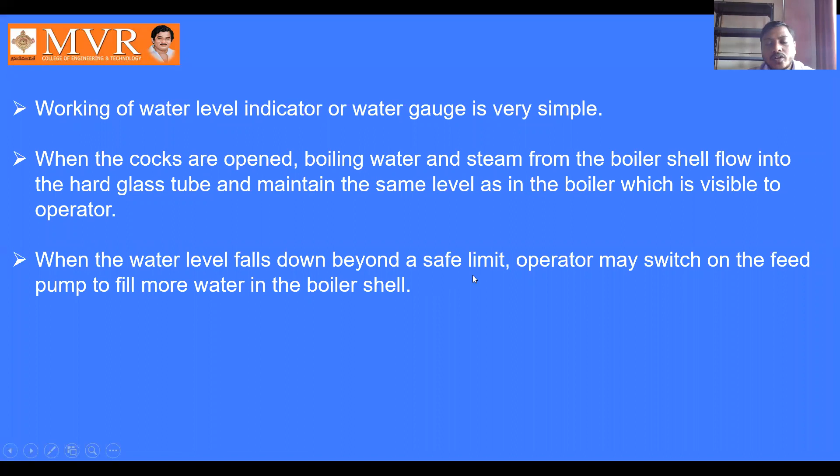When the water level falls beyond a safe limit, the operator may switch on the feed pump. In case of breakage of the glass tube by accident, water and steam contained at high pressure in the boiler rush at high speed towards the broken glass due to the large pressure difference between inside and outside of the boiler. If this breakage of glass takes place, we can control it using the steel balls.

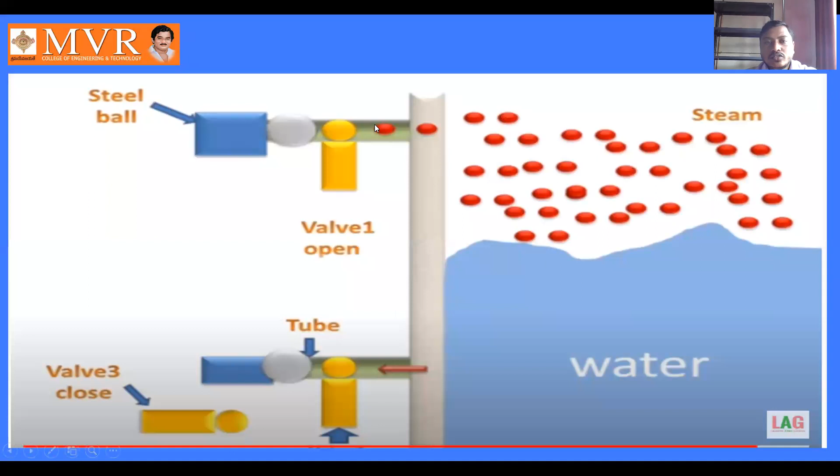Due to this, the ball resting in the cavity made in the passage lifts and rushes towards the end of the gunmetal tube and blocks the passage of steam or water. Then immediately the cocks can be closed and the glass tube can be replaced safely. These two cocks are closed and we can replace the glass tube here.

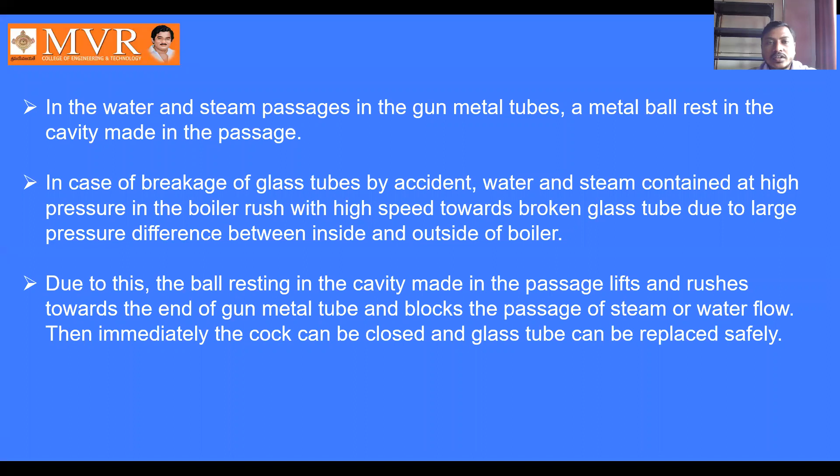This is what the feed water level indicator is about and how it works in the boiler.

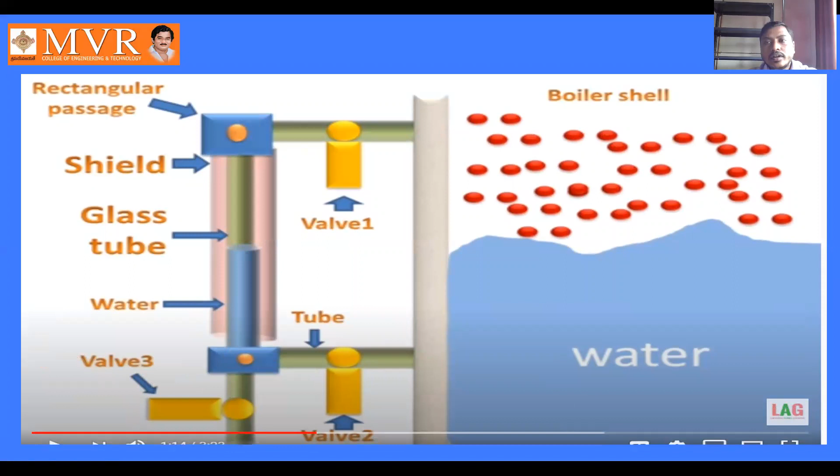As shown in the figure, it consists of two openings or valve seats which are closed by two valves attached to a single lever. By using a single lever, we have two valve seats.

The lever is pivoted at one end and attached to a spring at the middle. It is attached at one end and at the middle part is attached to the spring. The spring is fixed at the bottom end with the overall body of the valve.

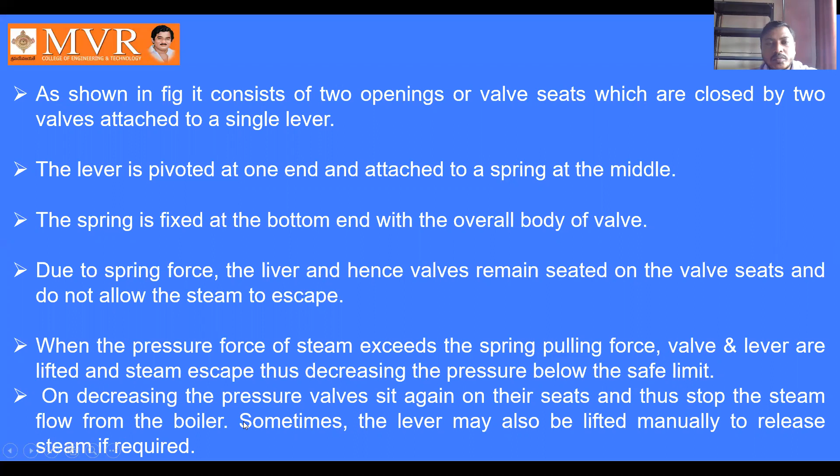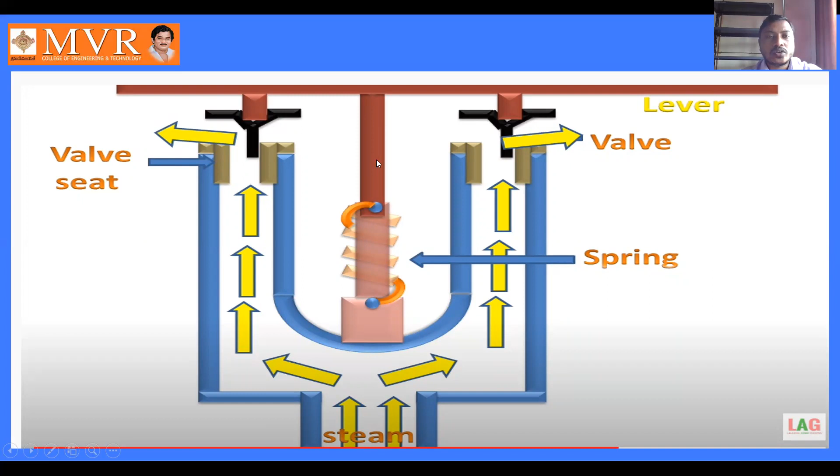The steam escapes outside, decreasing the pressure below the safe limit. On decreasing the pressure, the valve sits again on its seat and stops the steam flow from the boiler, coming back into its original position, where valve and lever sit in the same positions. This is what about the safety valve.

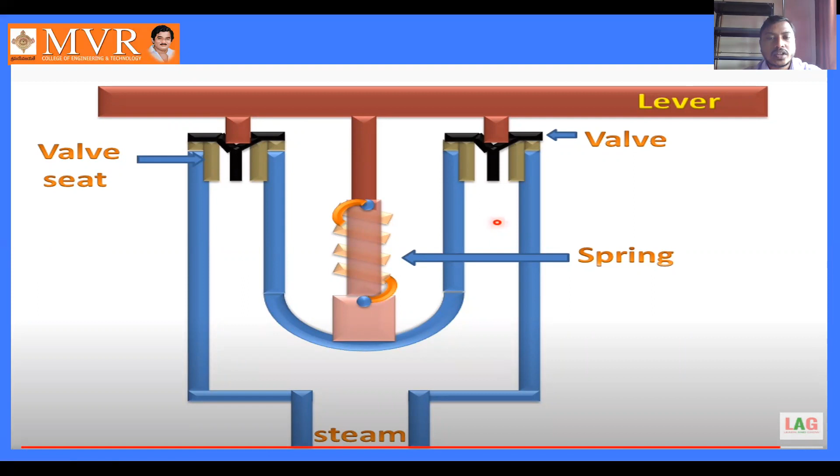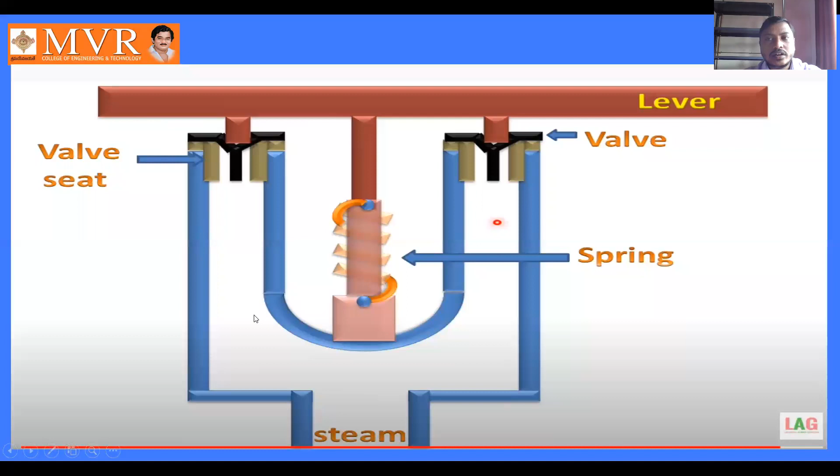Safety valve means nothing but a device used to control the steam escaping to the atmosphere. Due to high pressure developed, more than the spring load, the steam escapes into the atmosphere. When the pressure load is increased, the lever and valve move upward and the steam is allowed to exit outside. This is what about the safety valve.

Overheating can be caused by a low water level in the boiler. If we maintain a low water level in the boiler shell, overheating occurs and the boiler gets damaged. To control this damage, we use the fusible plug.

It is fitted in the crown of the furnace or firebox at the appropriate place. This is the construction: this is the hollow gunmetal body here, and this is the hollow gunmetal body too. These are the crown plates, and this black color shown here is the fusible metal, and inside this fusible metal in a conical shape is the hollow metal body. The construction of the fusible plug consists of two hollow metal bodies and one conical plug.

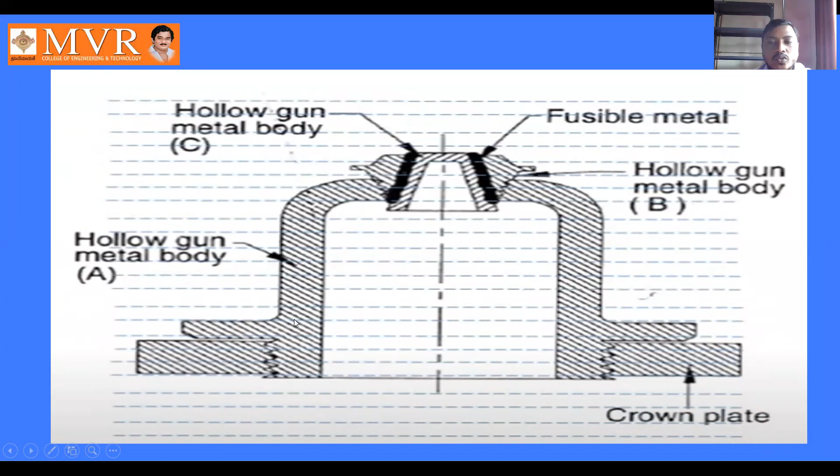The fusible plug is fully immersed in the water. The dotted lines shown here represent the water, and the fusible plug is fully immersed inside it. Here we see the hollow gun metal body, the conical shaped plug, the two hollow gun metal bodies, the fusible metal, and the crown plate. The full body is fully immersed in the water.

Now let's observe the working principle. Under normal boiler conditions, the fusible plug is fully submerged underwater, as we can see here. When the water level falls below the fusible plug, the water level decreases here, below the plug.

The plug gets uncovered from the water, meaning it is no longer covered by water, which tells us the water level has decreased. The upper portion of the plug gets exposed to the steam space. Above the water in the boiler, we have steam, and this upper portion of the plug is now exposed to that steam.

The steam cannot keep the plug cool, since the plug is no longer immersed in the water shell. Being exposed to the steam space, it gets heated. The plug gets uncovered from water, the upper portion is exposed to the steam space, and since it is exposed to steam, the plug cannot stay cool. This will overheat the fusible metal.

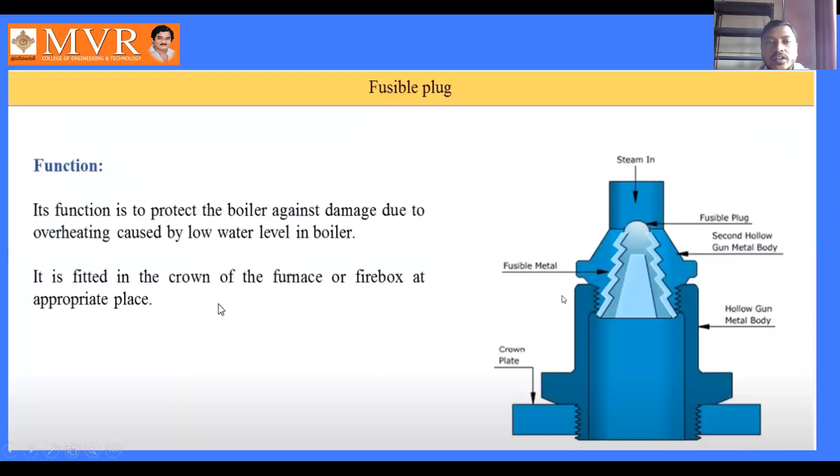The fusible plug remains submerged in water and its temperature does not exceed the limit. As this fusible plug is fully immersed in water, it does not exceed the melting temperature because its heat is transferred to the water.

If, under some unwanted condition, the water level comes down to an unsafe limit, decreasing the water level in the boiler shell, the boiler is going to be damaged.

The fusible plug is exposed to steam in place of water, and on the other side it is exposed to fire. So its temperature exceeds its melting point due to very low heat transfer to steam, and it melts down.

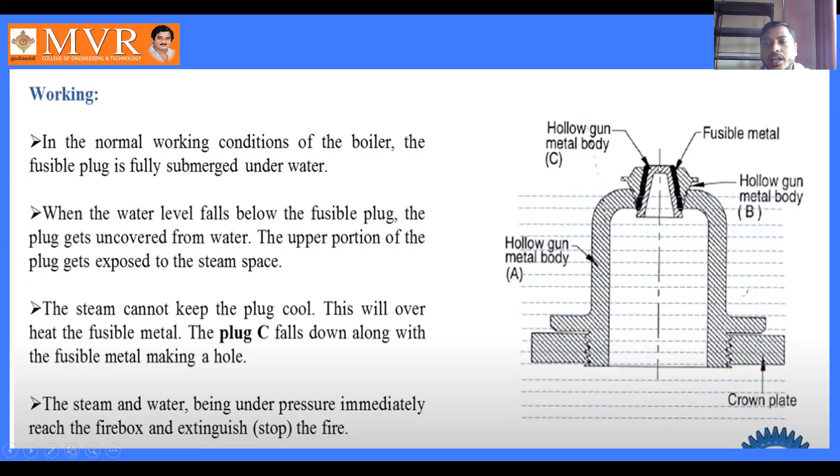If the water level goes down, the fusible plug we are having is exposed to the steam and its temperature increases. As the temperature increases, it makes a hole, and the fusible metal as well as the fusible plug drop downward.

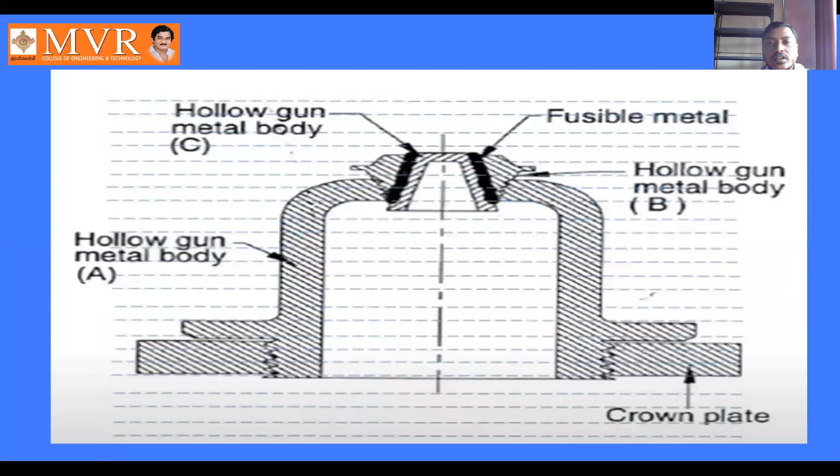Immediately, steam and water under high pressure rush to the firebox and extinguish the fire. This is how we use the fusible plug in the boiler to control damage to the boiler due to high temperatures.

Coming to the bourdon pressure gauge: we already know the pressure gauge from studying different types of boilers, and we observed how it works. The pressure gauge is used to show how much pressure is maintained in the steam. This is the bourdon tube type pressure gauge, which we can observe here.

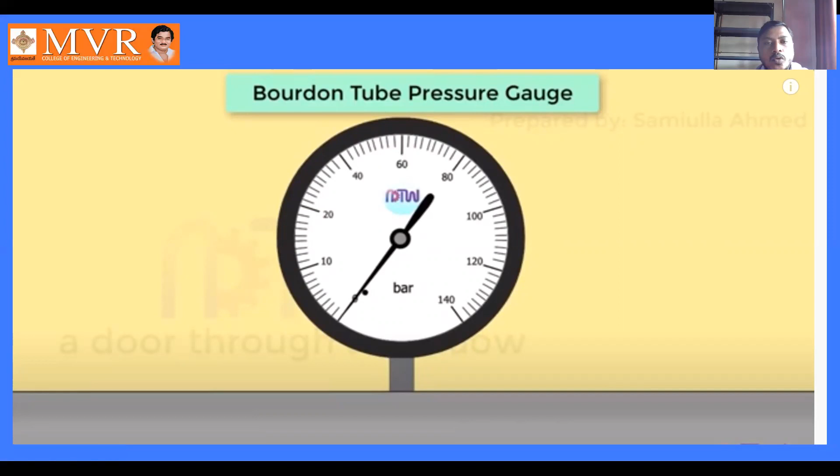In the bourdon type pressure gauge, we are going to know the working principle, construction, working, advantages and disadvantages. Let's look at the working principle here.

The working principle is that inside the dial gauge we are having a U-tube shaped bourdon tube, a C-type bourdon tube. The shape of the bourdon tube is somewhat downward.

After the working has taken place, it extends or moves somewhat upward. In the construction, when steam enters into the pipe, this is the pointer, this is the C-type bourdon tube, and this is the sealed end. One end of the bourdon tube is connected to this pointer.

We can observe the adjustable link here. One end is connected to the adjustable link, and this is the rack, and this is the pinion. This is the pointer, the segmental lever, the rack, and the adjustable link.

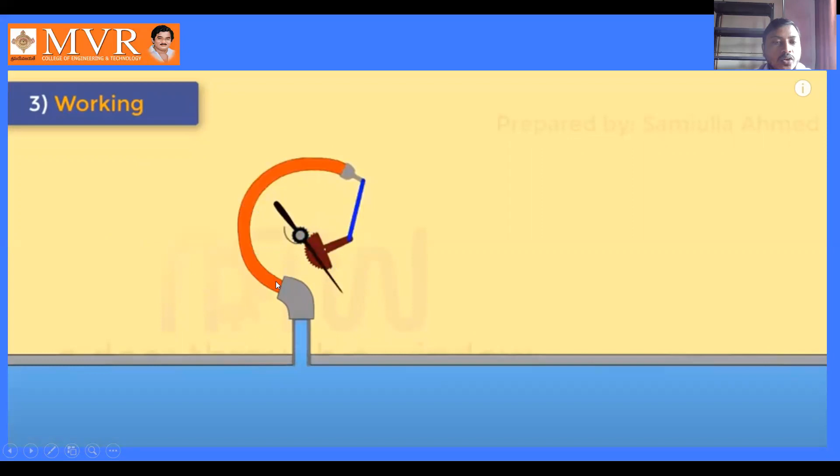The steam enters inside the bourdon tube. As the steam enters, this adjustable link moves somewhat upward and downward, and this pointer moves from the starting position to the ending position. This means when steam enters the bourdon tube, the pointer shows

the pressure inside the steam of the boiler shell. After this, the lever and adjustable link move somewhat upward, and we can see how the value is shown in the pressure gauge.

This is the working of the pressure gauge, where applied pressure acts on the inner walls of the Bourdon tube. The steam enters inside the tube from here, acting on the inner walls of the tube. Due to the applied force, the Bourdon tube tends to change cross-sectional shape from elliptical to circular.

Before the steam enters, the shape of the Bourdon tube is elliptical. After steam enters the Bourdon tube, it changes to a circular shape. This tends to straighten the tube, causing a displacement of its free end.

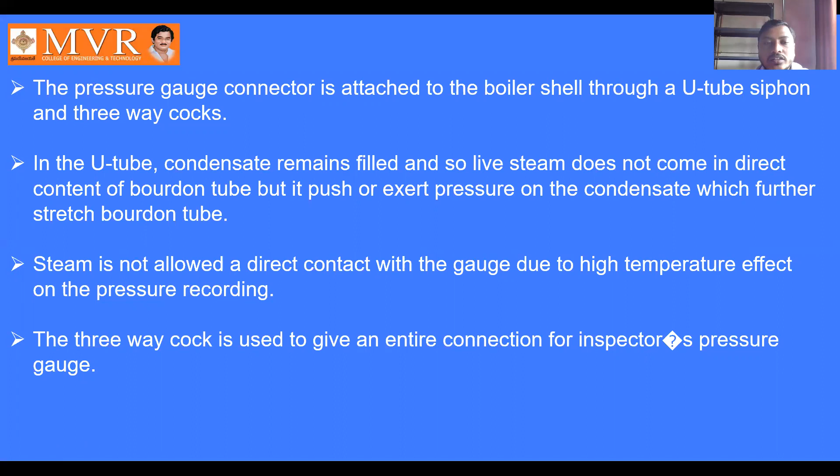In the U-tube, condensate remains filled so live steam does not come in direct contact with the Bourdon tube, but it pushes or exerts pressure on the condensate which further stretches the tube. Steam is not allowed direct contact with the gauge due to the high temperature effect on pressure recording. The three-way cock is used to give an alternate connection for an inspector's pressure gauge.

This is about the working principle of the Bourdon tube pressure gauge.

Here we see the pressure gauge, how it moves from the starting point and how it shows the pressure of the steam: the working principle, construction, working, advantages and disadvantages.

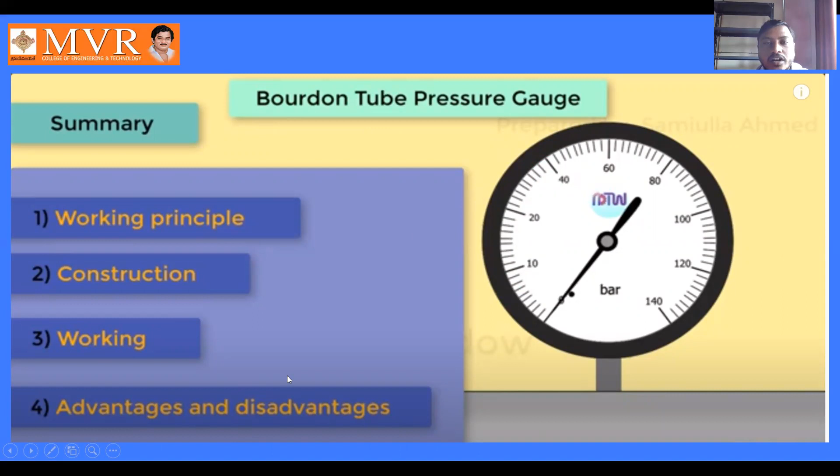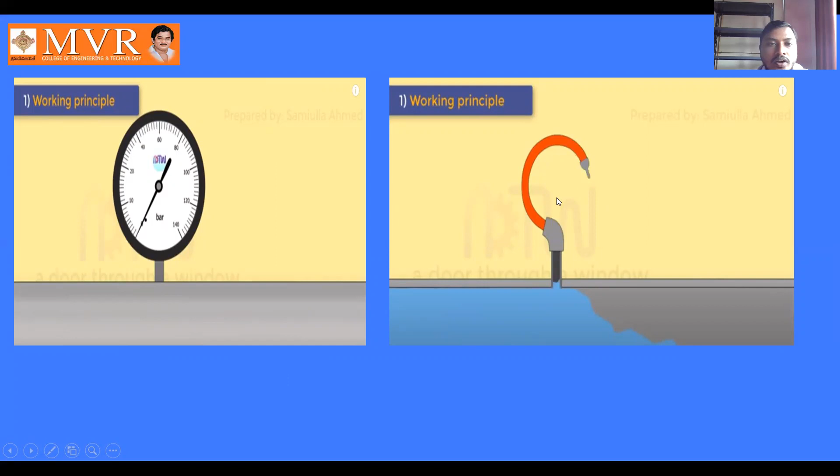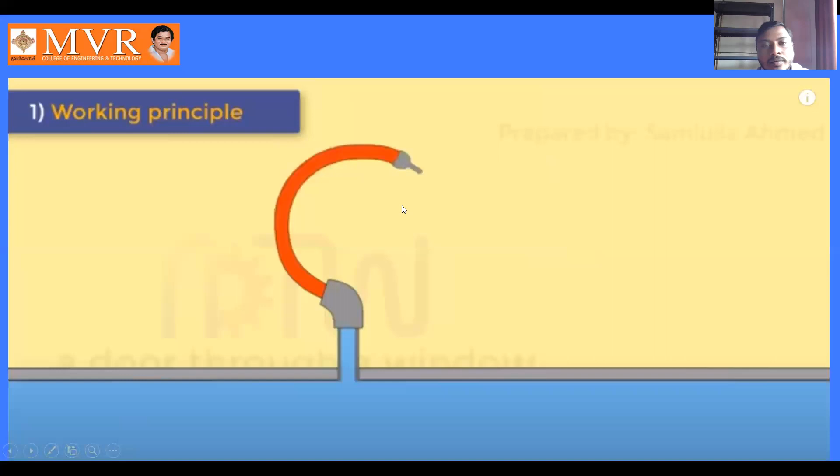When steam has not entered the Bourdon tube, the pointer is at the position of 0, meaning the Bourdon tube is somewhat down. When steam is entered into the tube, the Bourdon tube moves upward. This is the construction.

The pointer shows that when pressure increases, its value increases. The blue color indicates steam entering inside the Bourdon tube. As steam enters, the pointer moves upward and the adjustable link moves the tube upward, and the pointer shows how much pressure is inside the steam.

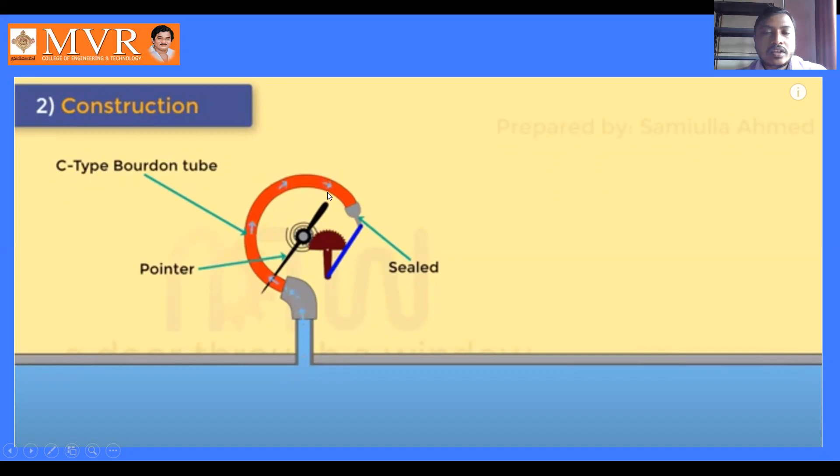This is the working principle: the Bourdon tube is connected at one end to the adjustable link and at the other end to the pump. This is the starting position, when steam has not entered the tube, the position is like this.

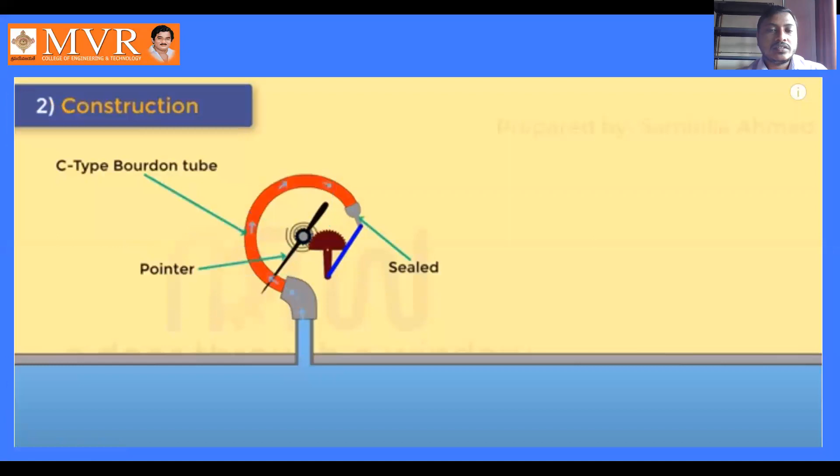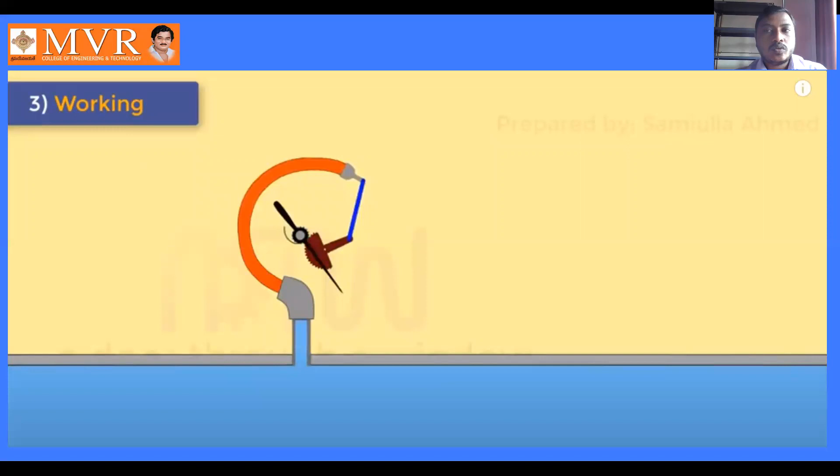If pressure increases, the adjustable link moves forward and the Bourdon tube moves upward, and the pointer shows the value, starting from 0 to the pressure of the steam, indicating the pressure value inside the steam. This is about the working principle of the pressure gauge.

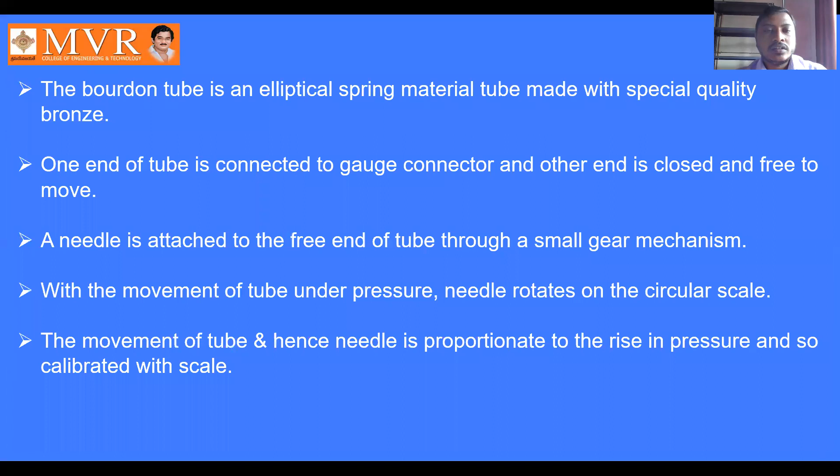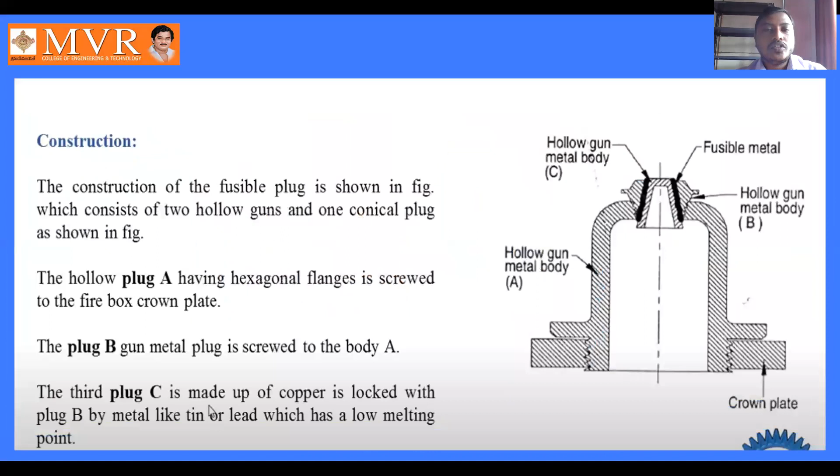In this video, we have learned about the boiler mountings: the water level indicator, the safety valve, the fusible plug, and the Bourdon pressure gauge. In the next classes, we will learn about different boiler mountings. Thank you.